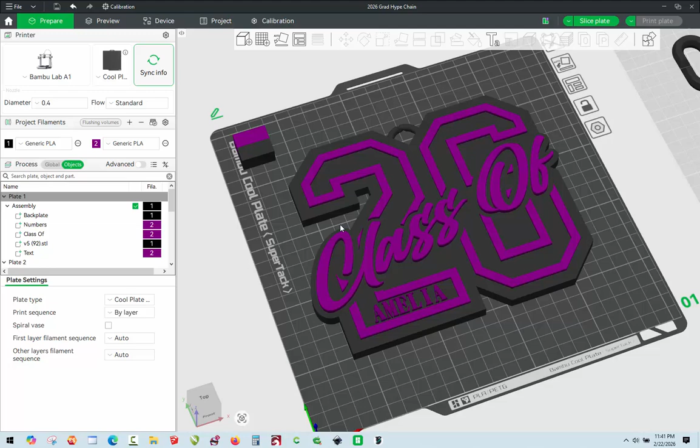In this video, we're going to be taking a look at modifying an existing file that I just finished up.

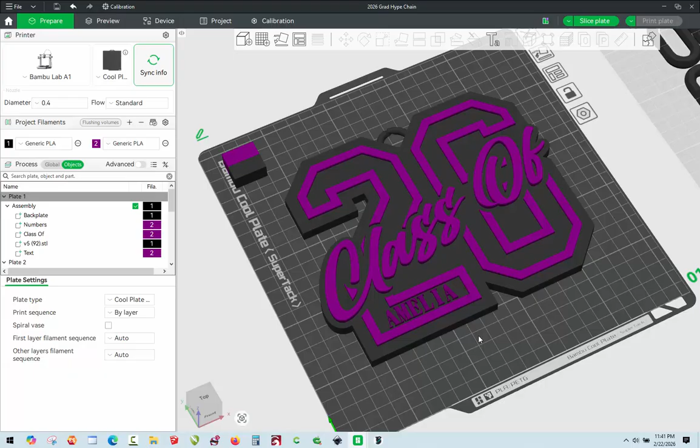So this is currently a hype chain, and we'd like to make it into a keychain. We will show you how to go about making those modifications.

First, over here on our secondary plate, let's hold the shift key down and get rid of all of our links because we don't need that. Then we can get rid of that secondary plate.

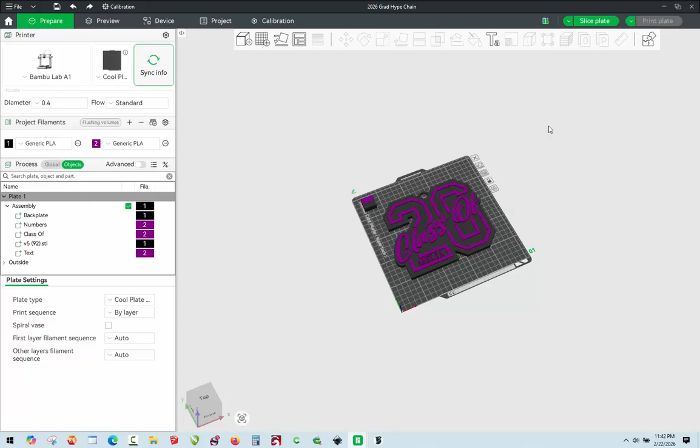Now I'm using Bambu Studio in this example, but you can use whatever slicer you like. They all have similar capabilities in that regard. In fact, the Orca slicer is almost identical to Bambu Studio because it is a derivative of it.

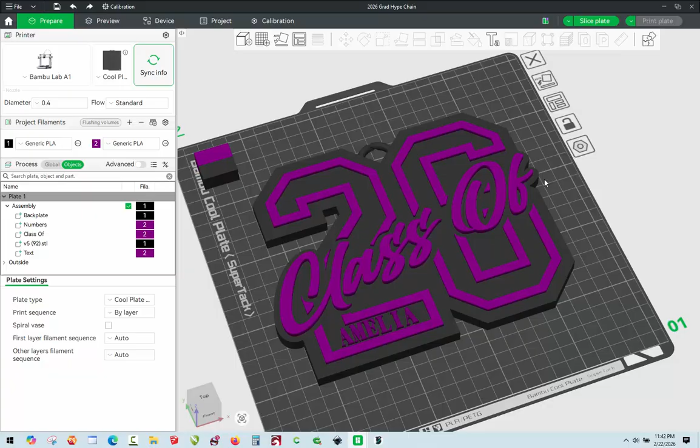One other key point about slicers: a lot of people think we can't use Bambu Studio because we don't have a Bambu Lab printer, and that's not true. I didn't realize that at first either, but Bambu Studio supports about any modern printer on the marketplace. There are profiles available, so you can use it whether your printer is a Flash Forge, Prusa, Creality, or whatever - there are profiles for just about every printer in the market.

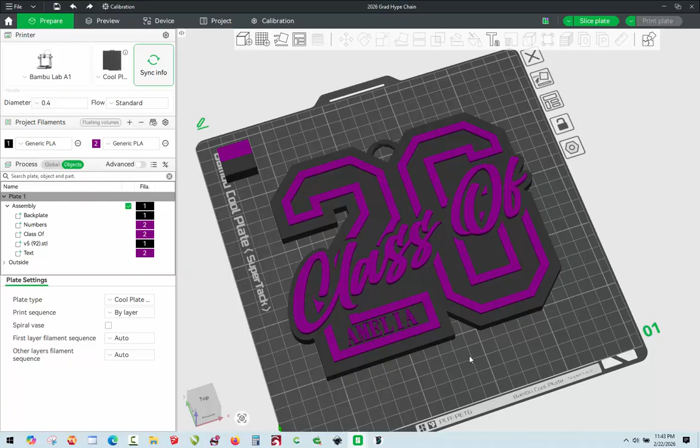So what we want to do is modify our hype chain here and make it into a keychain. The first thing is to hold down our Alt key and click on that little split ring there - we don't need that for our keychain, we're going to build a different one - and then of course we have to resize our hype chain.

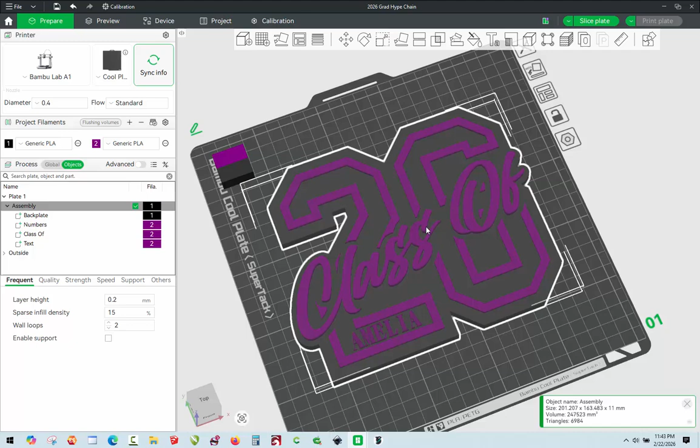So we'll go up to scale. Usually what I do is make my keychains about 3.5 to 4 inches, somewhere in that range. Now 100 millimeters is 4 inches, so 75 millimeters is 3 inches.

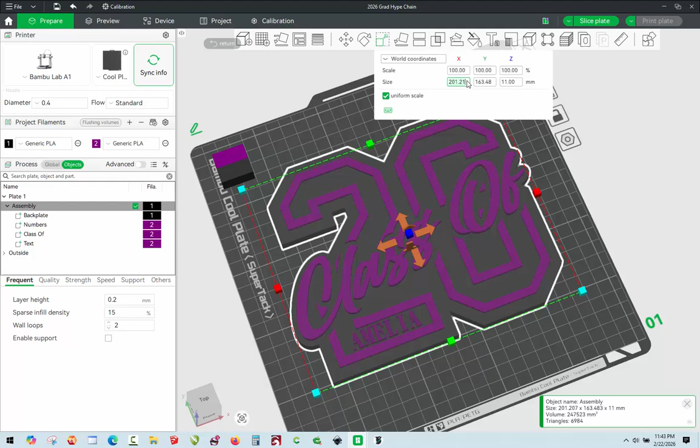We'll go ahead and use uniform scale for this. So we're going to scale this - if we want like 3.5, that's actually 87. Okay, so that's what we're going to do, we're going to make it 87.

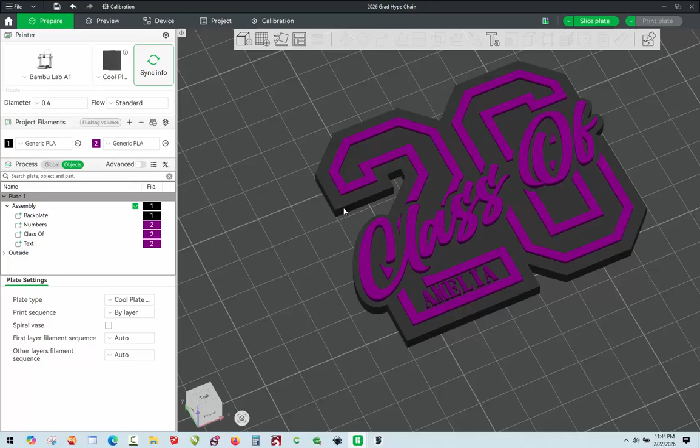So now once it's scaled down to keychain size, we can go ahead and see what we're going to do here. First, we're going to alt-click on the black piece and define its size. We'll go to scale, and it is currently 3.

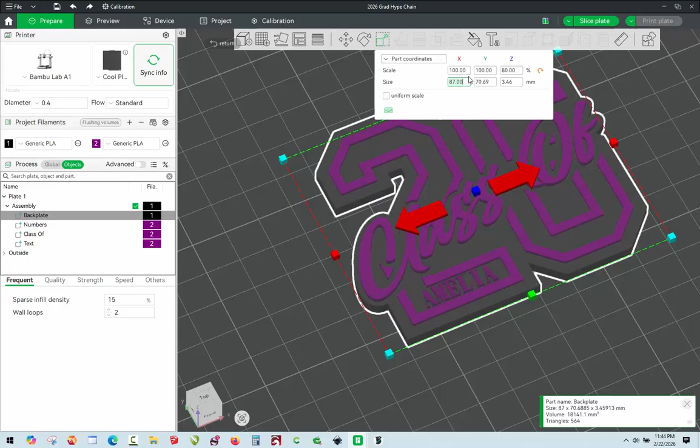Let's go ahead - I don't know, maybe 4 or 5. Let's do 5. Now we do want to turn off uniform scale, so we'll go ahead and make it 5 millimeters thick.

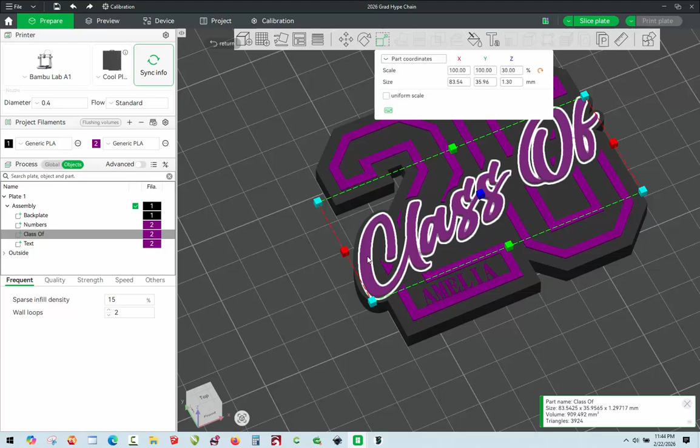Then our numbers here, I like to go ahead and have them raised, so let's scale those to maybe 1.5 raise. And then the class of, go ahead and scale that to 1.5 - I think that'll look good. And then our custom text down here, we can go ahead and scale that to 1.5 as well.

Obviously, we would not probably print this with Amelia on it - you could add your own info here.

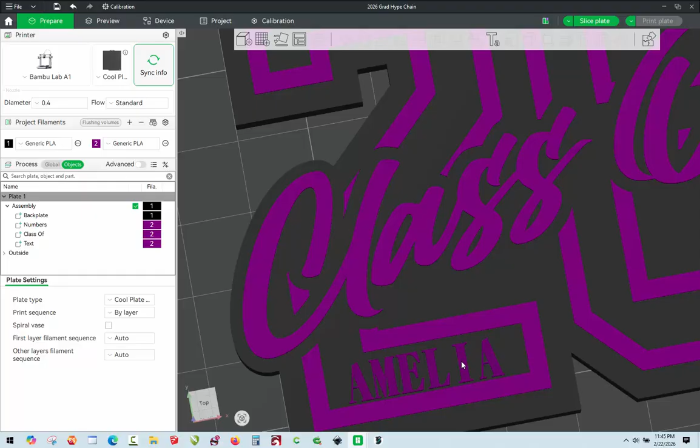But I do want to go ahead and move this. So we're going to alt-click on Amelia here and just kind of recenter it up a little bit. If we go to the very top here, just click there - now we're looking straight down on it, and it's easier for us to line things up that way.

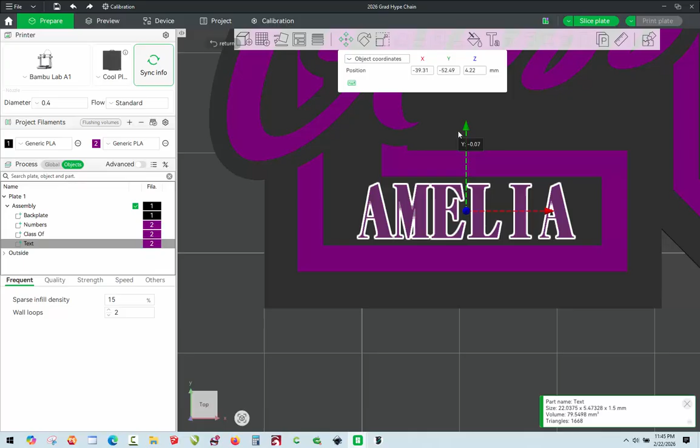We can also go to the move tool and drag that. Sometimes it's a little bit easier to drag it in very small increments this way. All right, I think that looks pretty good - yeah, that looks pretty good.

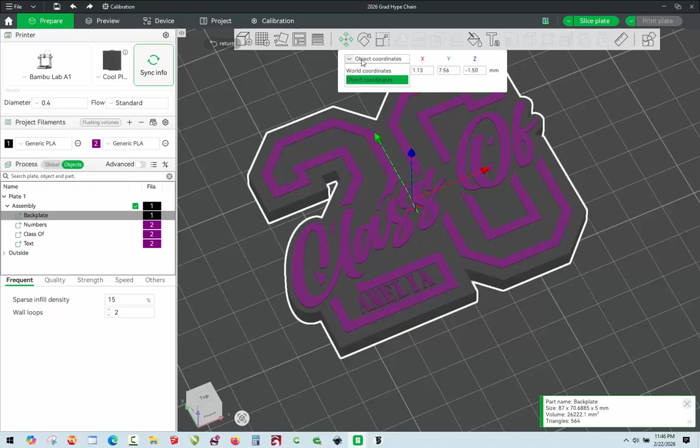Now I am going to go ahead and slice this real quick. I guess we should change our Z heights a little bit to make sure it's going to slice correctly. So our back piece is 5 millimeters thick, so its Z height should be 2.5 millimeters off the plate, and it is.

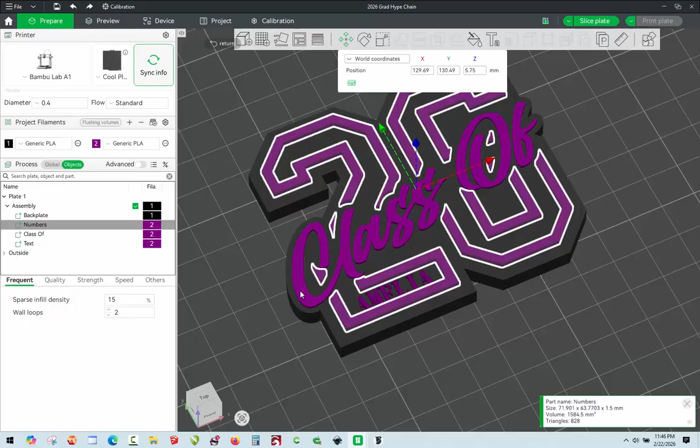And then our 26 here is 1.5 millimeters thick, so its Z value is 0.75. It's 0.75 and 0.75 is 1.5. So what that means is we need 0.75 plus 5 for the thickness of our back plate. So that Z height for our numbers, go to world coordinates here, that Z height should be 5.75. And as should the class of, we'll make that 5.75.

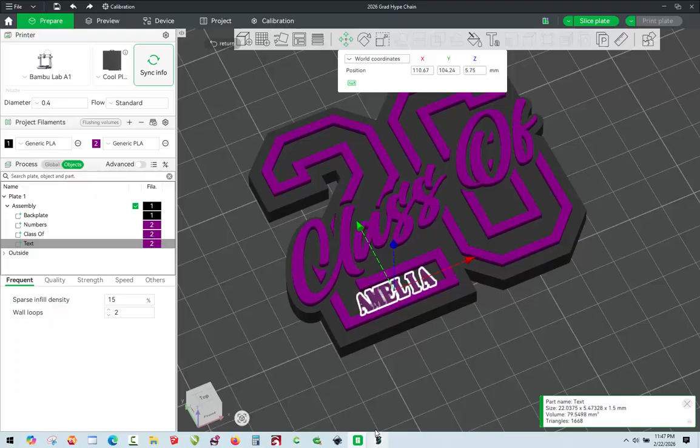And then, of course, Amelia has to be at 5.75 because all of those are 1.5 millimeters thick. So there we go - now everything is sitting on the plate here like it should be.

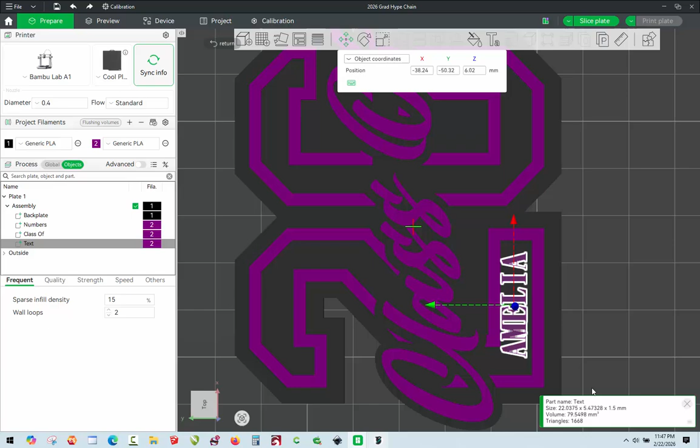Now we'll go ahead and move Amelia a little bit here. Let's go to our very top-down view here - it'll be easier to see.

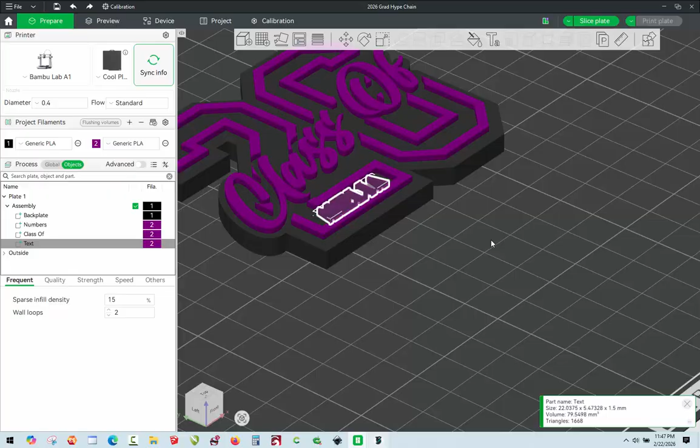Now you can see the Z height did change here, so we will put that back to 5.75. So there we go, now I believe everything should be at the proper height here. Let's go ahead and double check these.

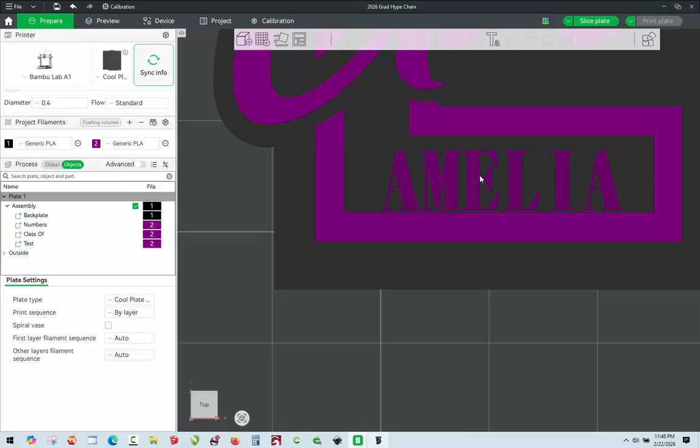Indeed, yes. Okay, so now, this still does not look correct. Amelia here, see that there? Not sure what's going on here, but that Amelia does not look correct.

So we are going to move it up. We are in world coordinates. Let's go back here, we need to be back here. That's what the issue was, we were in the object coordinates. So there we go, have the Z set back to correct again here. It's an easy mistake to make.

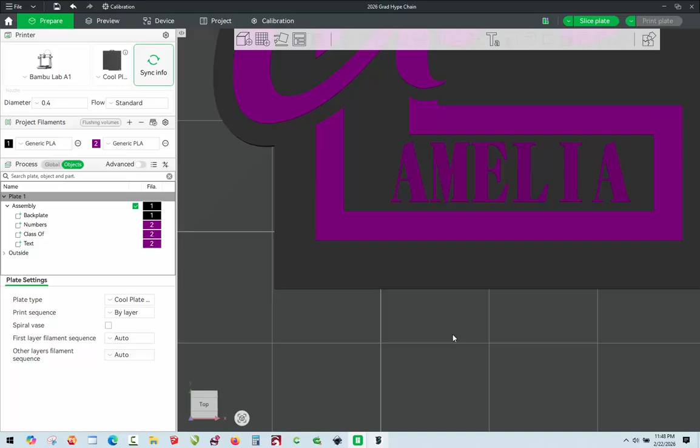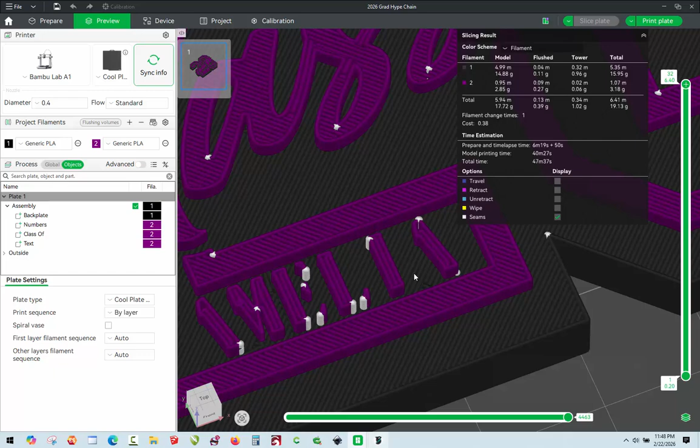All right, so now let's go ahead and slice this. I'm curious to see if all of these elements in Amelia actually show. This is not a great font because it has very tiny design elements here, but let's look. Yes, so you see there, because of that very thin line, it's not going to print with a 0.4 millimeter nozzle, which is what I expected when we're printing this small.

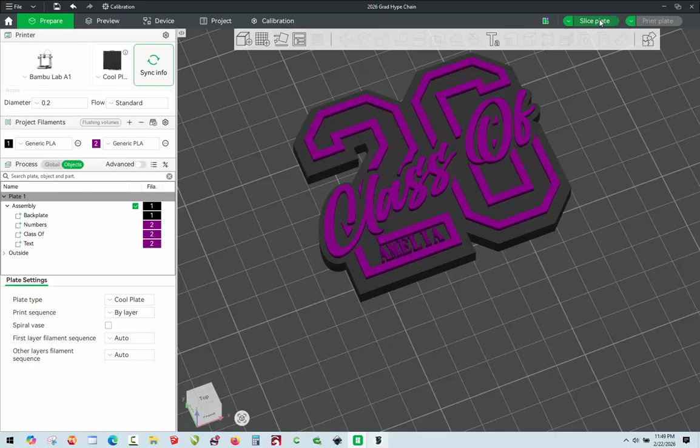Now if we want to switch over to a 0.2 nozzle, I do have one, so we could go ahead and just reslice it. It might possibly work. We could also consider layer heights and things like that. But I probably would just use a different font, is what I would ultimately do.

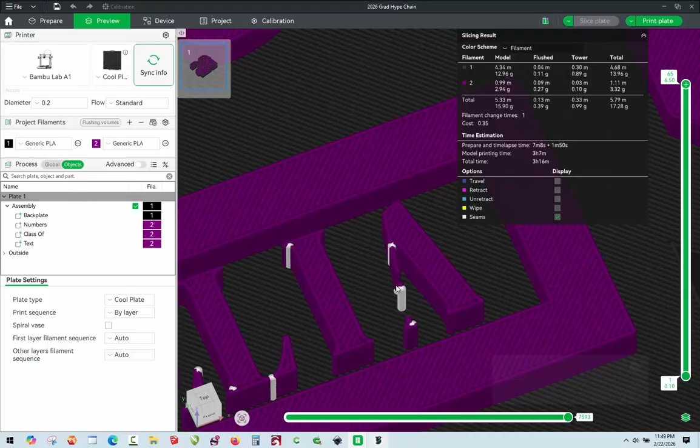Because we are still dropping detail, so when that happens to you, it's just really a fine detail issue. So we will switch back to our normal nozzle, go back to our Prepare tab here, and we will get rid of this text because I knew it was likely going to be too small.

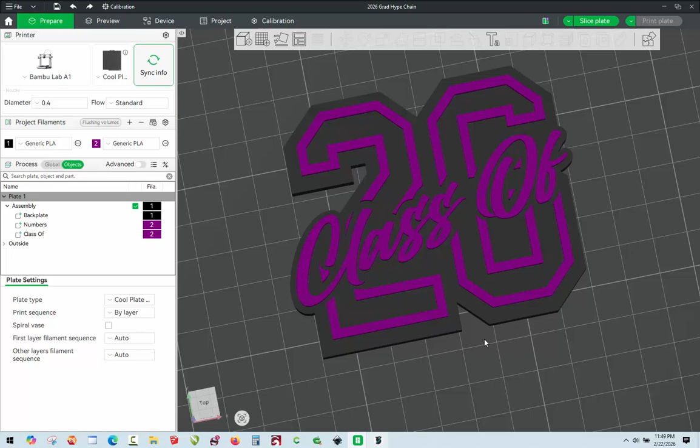But that's not to say that we couldn't use a different font and be able to customize it even in a keychain size. All right, so now what we need to do is add a key tag so we can add some keychain hardware. Let's go ahead and do that real quick.

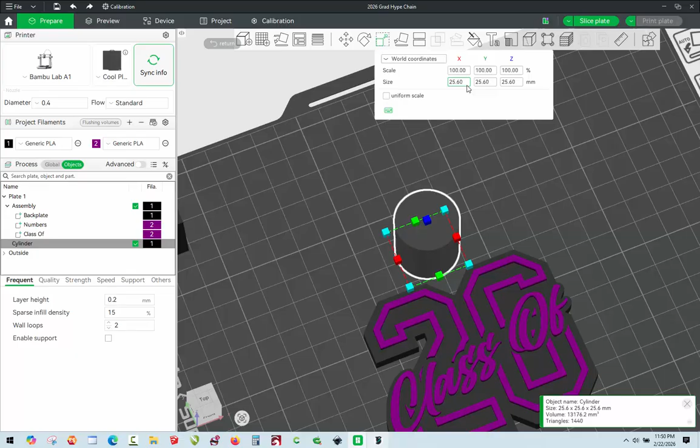We're going to add a primitive, and we're going to add a primitive cylinder. And we're going to make our cylinder 8 millimeters - this is what I usually do anyhow, that's kind of my standard. And then we are going to make it 5 millimeters tall.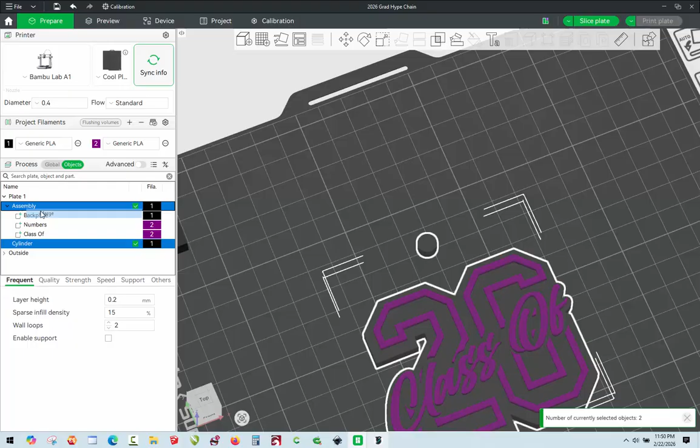Now, in order for this to print properly, it needs to be part of the rest of this assembly. So let's go ahead and make it rest of the assembly. Hold the control key down and click on the assembly, then right click and choose merge. And then what we will do is alt click on the cylinder and control C, control V - so now we've duplicated that cylinder.

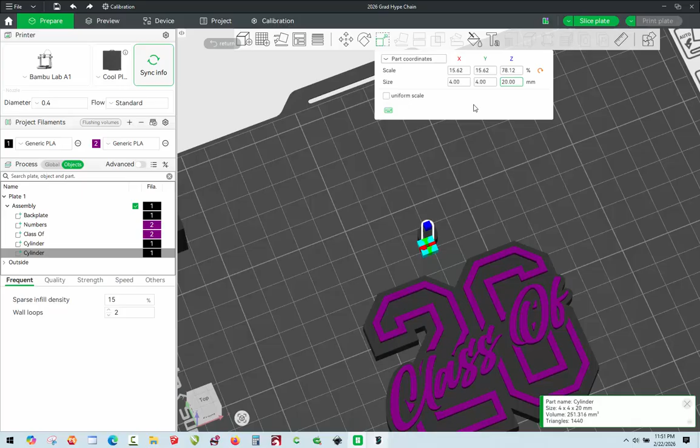So now we're going to go back up here and we'll make it 4 and 4. And for the height, let's go ahead, I don't know, let's do something crazy like 20, okay? So now we've got this going on. So all we're going to do now is select both of those cylinders, okay?

And really, we're just going to come in here, select our assembly, and then we will go to the mesh boolean, and we're going to go to subtraction. And what we want is we'll move everything over here, even this one. We just need one cylinder, not that one.

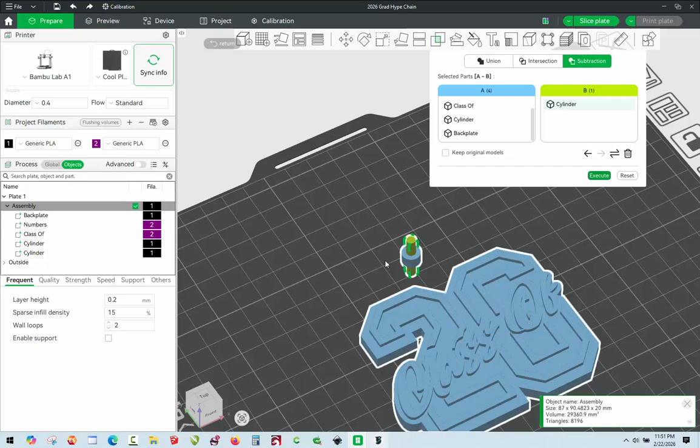We're going to do the duplicate. There we go, and we're going to go ahead. You can just barely see that some of these are highlighted, but now you see only that one cylinder is highlighted, so it only moves that over. So you see how that's green and that's blue. Let's go ahead and choose execute, and then it will go ahead and remove. And then there you go.

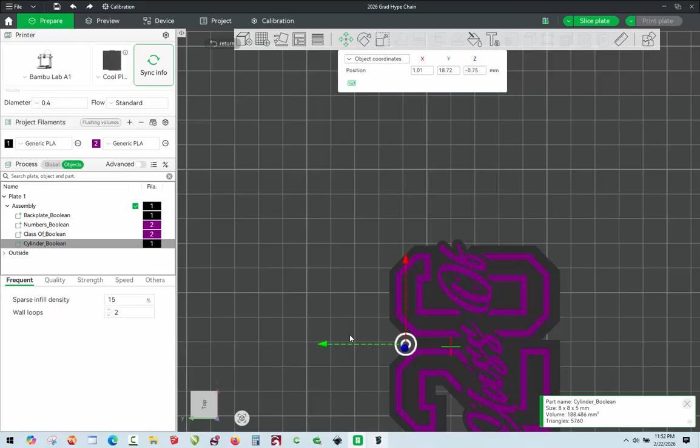Okay, so now all we could do is go to the top view here, and we'll alt click on this, and we'll go to our move, and we'll just go ahead and move it into place here. Now I just use my keyboard shortcut rather than come up here and actually click on move, but then we can kind of see a little bit better what we've got going on here. Let's pan, let's zoom in a little bit tighter so we can see this a little bit better.

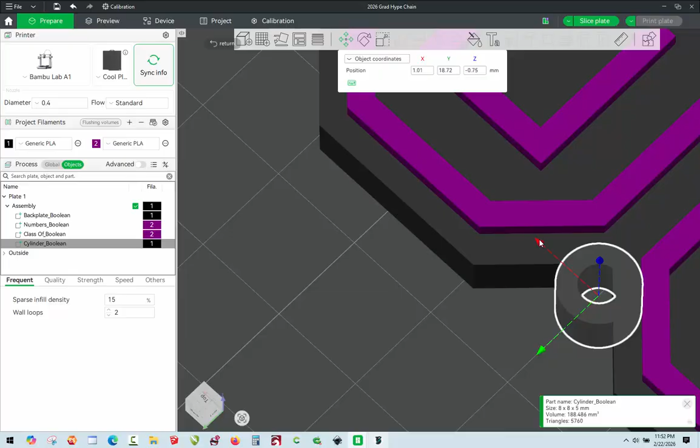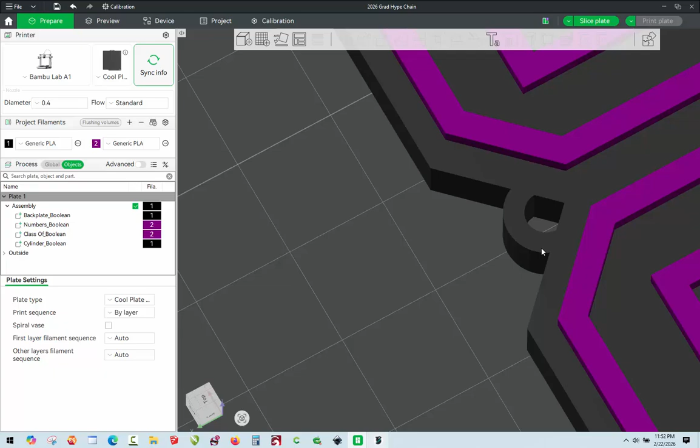So there we go, let's go ahead. You can see we're a little to the, I don't know, I guess it's to my right, but we're just going to slide it over a little bit. Okay, doesn't have to be super perfect - whatever kind of looks to be the center for you is good enough. And then we'll go ahead and just move it down just a little bit here. Something like that, okay, and that's big enough for our jump ring to fit into.

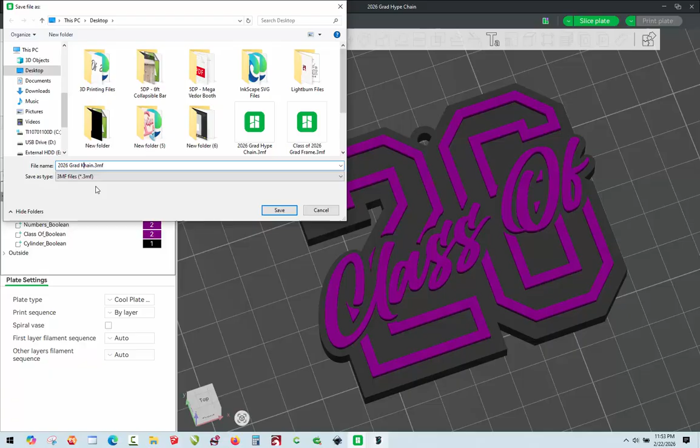And there we go, so now our hype chain has become a keychain. Pretty simple stuff. So now let's go ahead and hit File, and let's save project as. You can see we've got the hype chain, and so now we're going to change that to keychain. And we'll hit save, and there you go.